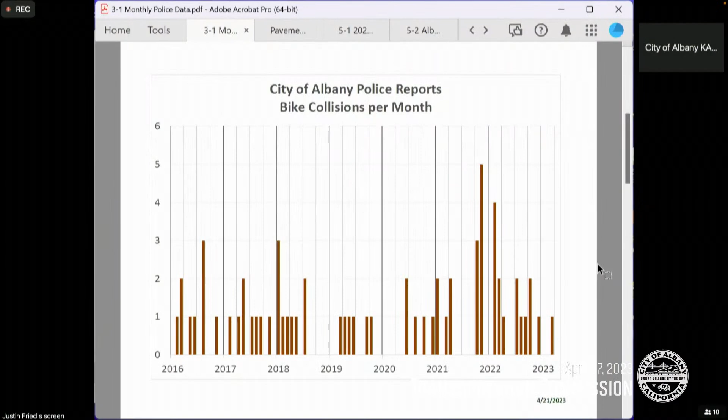There was 1 pedestrian-involved collision reported in February and 2 in March. There were 0 bicycle-involved collisions in February and 1 in March. In February, there were 9 reported collisions, 4 of which were listed as injury collisions, and in March there were 14 collisions, 7 of which were reported as injury collisions.

Moving citations: 25 were issued in February and 33 were issued in March. And there was 1 DUI arrest made in February and 2 in March. That concludes my report on the police data.

Are there any questions from commissioners? Would anybody like to make public comment on this item? Anybody in the room? Oh, yes, we do have someone in the room. Can you please stand at the microphone there so that everyone online will be able to hear you clearly? I'm sorry, Harry, I would like to make a comment. I can do it later.

The graph showed quite a reduction in tickets given to motor vehicles. Is there a reason why there's so many fewer than in years prior?

Any other public comment from folks in the room? Any public comment from people online? We do have 1 hand raised online. Jeremiah Pinguelo, please go ahead.

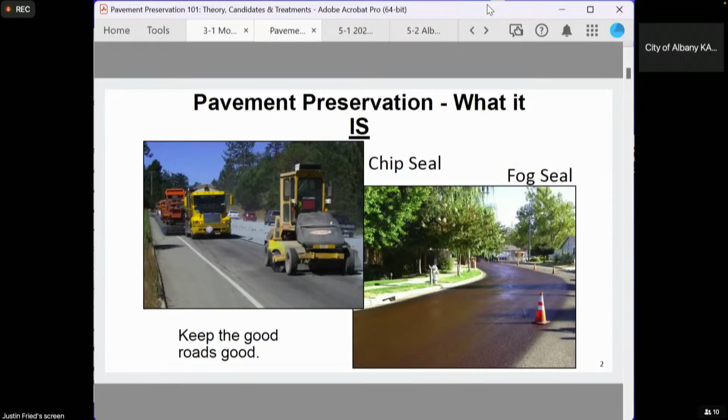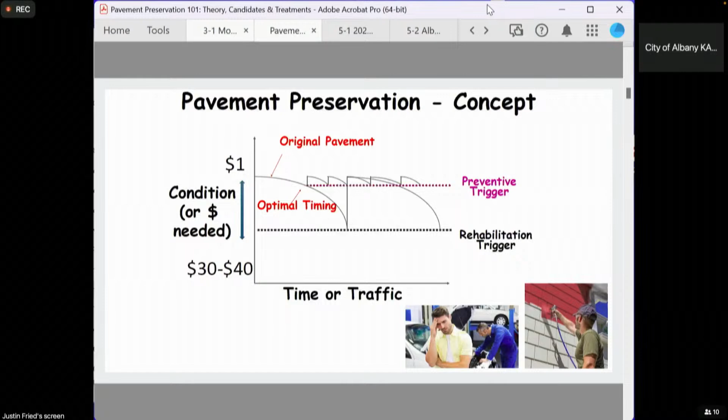An overlay should last a lot longer than 20 years, same as the wood at your house. The key is sealing it, continually sealing it, protecting it from weather and sun.

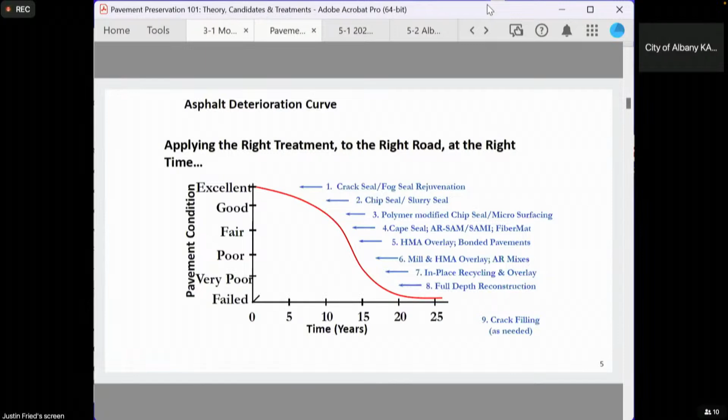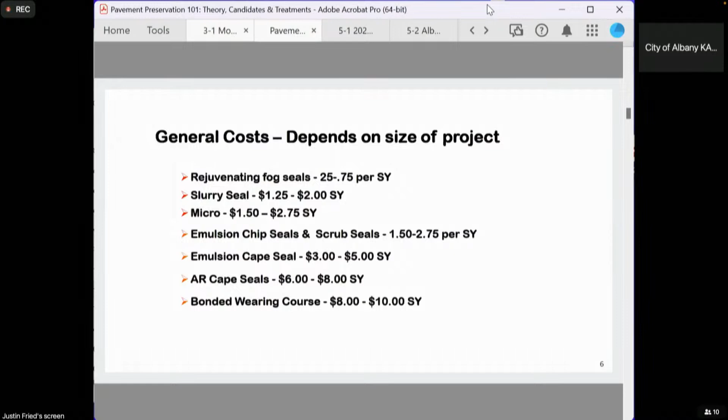These are your typical costs for pavement preservation treatments. As you can see, the cheapest is about 25 cents to 75 cents a square yard. And even on the most expensive high-end preservation treatment, it's still only about $10 a square yard. Greatly different than doing an overlay.

The best way to show you this is an example of a city. The example I have is a 300 lane mile road with their budget being 1.5 million. In my first scenario, the breakdown will be $1 million going to reconstruction, so overlays and whatnot, and then the 500,000 left over going into preventative maintenance, or keeping the good roads good.

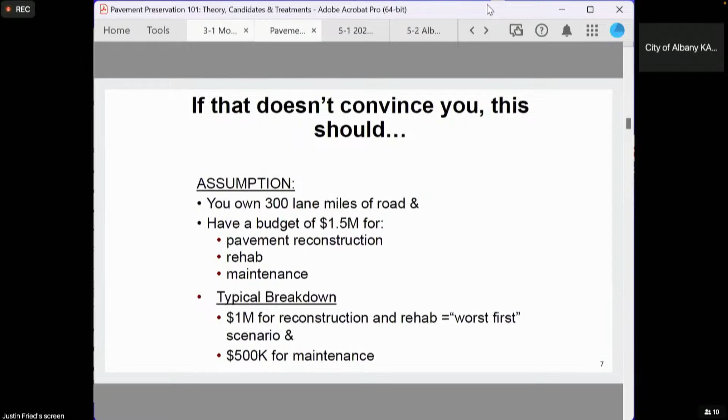In our first example, I put down a 3-inch mill and fill, which is 3 to 4 inches, pretty common in most cities. When you do the math on it, it gives you about 5.7 lane miles for that $1 million. When you look at the cost breakdown of the pavement maintenance, $4 a square yard is usually a 2-layer system. You get about 17.8 lane miles, so a considerable difference in lane miles. The total lane miles repaired is 23.5.

The most important number is the road cycle. What the road cycle means is the next time you've gone through your entire network and come back to your roadways is now 13 years later. And a lot can happen to a road in 13 years.

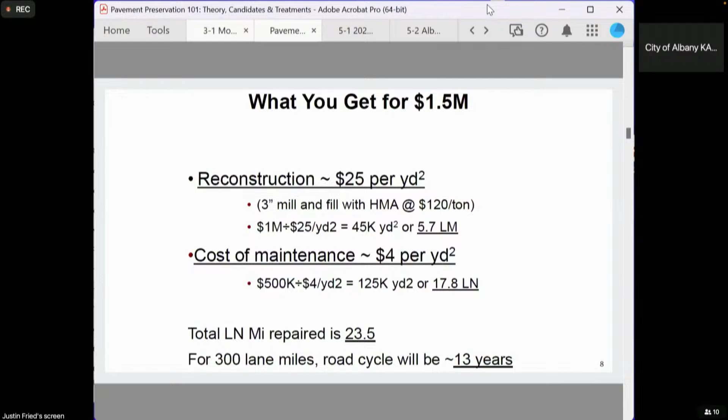So what happens when you flip it? When you put that 500,000 into reconstruction, you now go from constructing 5.7 lane miles to 2.8, roughly half. But when you put that $1 million into maintenance, you're now covering 35.5 lane miles as opposed to that 17. Considerably more roads are being covered and protected. And the most important number is that road cycle is now down to 8 years.

What I tell agencies all the time is a roadway that's already in really bad condition isn't going to get much worse 2 to 3 years later, but that road that's right on that trigger line, it's really critical to put the money into it and salvage that roadway.

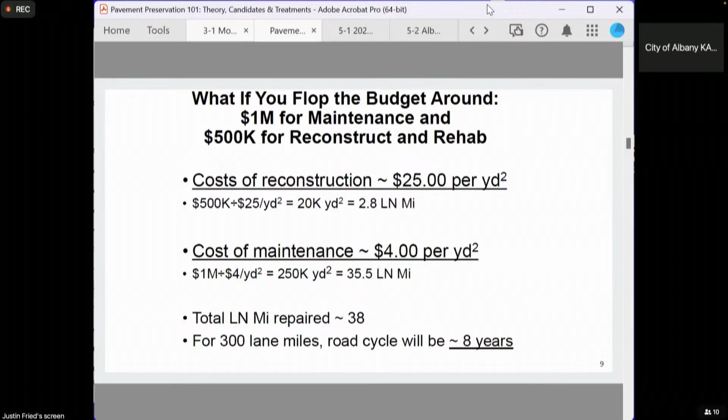The example I have was a city in Marin County called City of Novato. When they started doing preservation was in 2003. They started using slurry seals and cape seals. And you can see as the years went on, their PCI started to raise up. So what they were doing is they were covering their network, even on some of the more distressed roadways, with pavement preservation.

When I talked to them in 2015, I called the city engineer up and she told me, we're caught up. So it took quite a few years, but what caught up meant was they had sealed and preserved their entire network, where now the following year coming into it, they had millions of dollars to put into ADA. They had millions of dollars to do their collectors and arterials in their city, doing overlay. Not saying overlay isn't needed, but now they had the funding to do that.

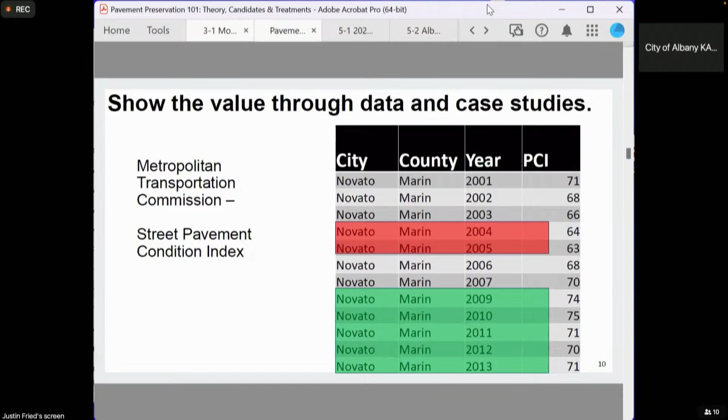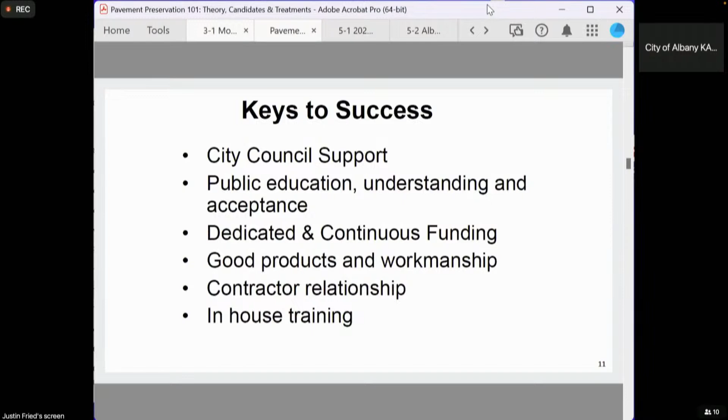This slide says keys to success. It starts from the top with city council, public education. Dedicated funds means having it be an every year or every other year thing at a minimum. When you wait 5 years to do maintenance again, then you fall down and the PCI goes out in your city. Good products and workmanship and contractor relationship is kind of what your city does already with inspection, consulting, and making sure it's being done right.

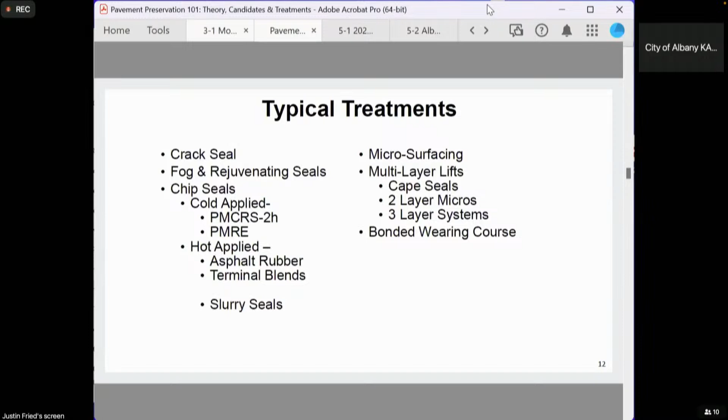Here are the treatments again in order of when they would be used, which I should have put earlier. This is the map of the current PCI condition of the city of Albany.

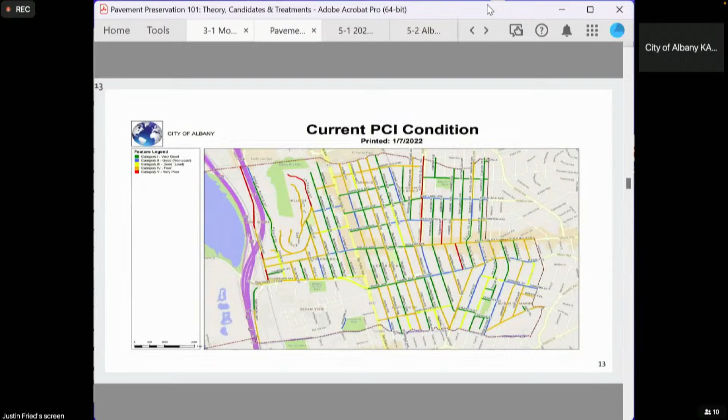It's hard to tell, but the green and blue category streets are in good shape, and then you have a lot of streets in the good, poor, and very poor network. So what I was looking at as a consultant for the city is I went out and reviewed all the good and poor streets to select candidates for the upcoming slurry.

Ideally, you want streets in good PCI, but what do you do with the streets that are on the border? You might not have the money to be doing an overlay. And in residential areas where you don't get a lot of traffic, putting a big investment like an overlay isn't a waste of money, but if you want to cover more lane miles, preservation is the way to go.

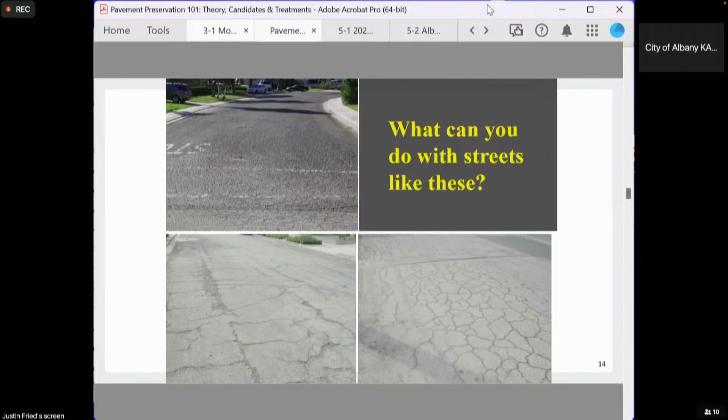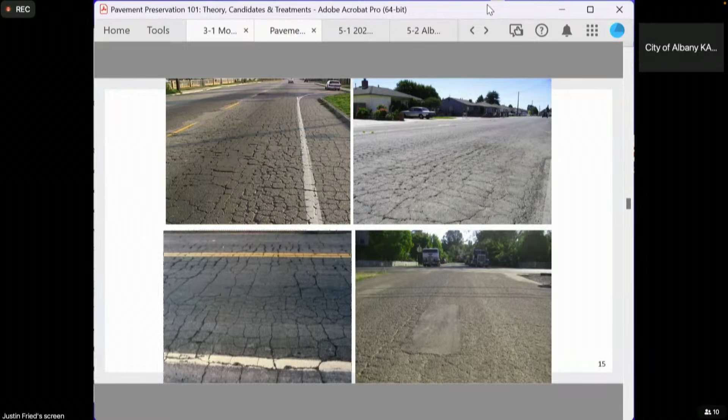There are some streets here in the city of Albany that look like this, and what you're looking at is just heavy distress, called alligator cracking. But structurally, the road is still in good shape. We're doing a low-cost maintenance treatment to extend your pavement life and give you the flexibility down the road to put money in other areas.

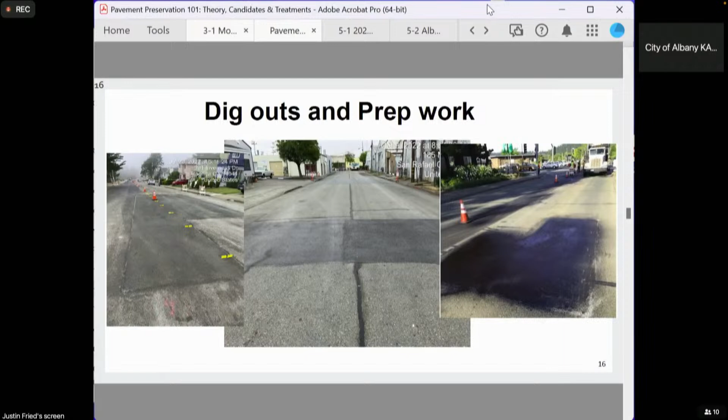One thing the city of Albany is doing right now is before any treatment or seal is done, they're going out and doing dig-out repairs. So on a stretch of road that isn't a good candidate, that might have a couple areas that are failing or not doing well, they go in and do a localized dig-out repair, bringing the road into a good condition to do a seal.

And then crack fill is your number one, your first line of defense. Keeping water from getting down below into the subgrade and ruining the road from the bottom up is what you're trying to prevent. Back to like sealing your house, right?

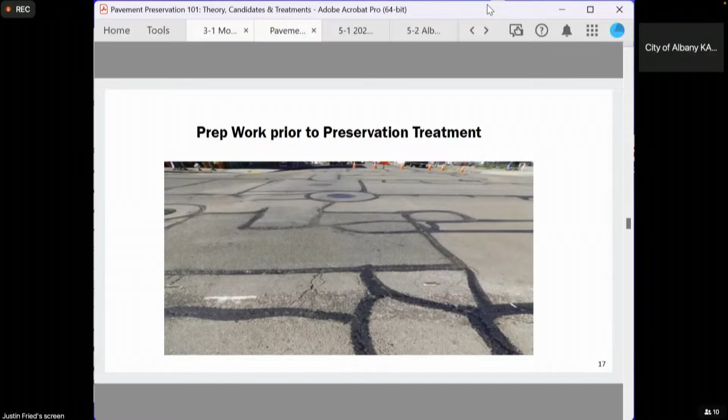I'm going to go through some examples of neighboring cities that are using these treatments, even on lower PCI roadways, and getting 5, 7, 10 years of protection.

So first, the city of Martinez. On a road that was a PCI of 49, pretty low. When you look back at the map, in those orange and red categories, that usually falls in that arena. With the city of Martinez in particular, they didn't have the funding, so they were looking for a different solution. So they tried the two-layer micro-surfacing system. You can see the size of the cracks and the distress of the roadways, and then down below the 7-year later picture on a maintenance treatment that only cost them about $5 a square yard installed and got 7 years of protection. I live in Martinez, and that's a 12-year mark and still looking great.

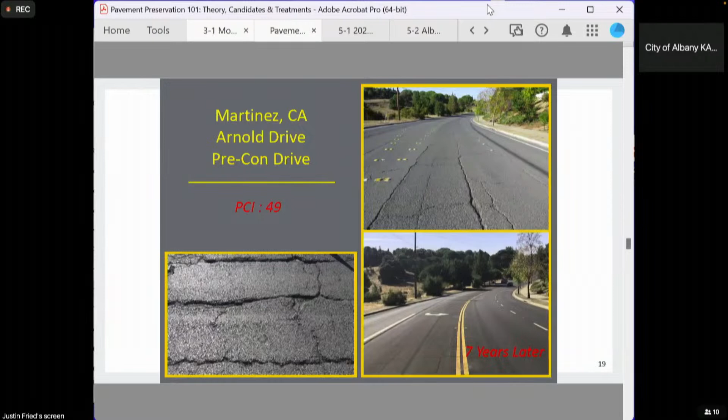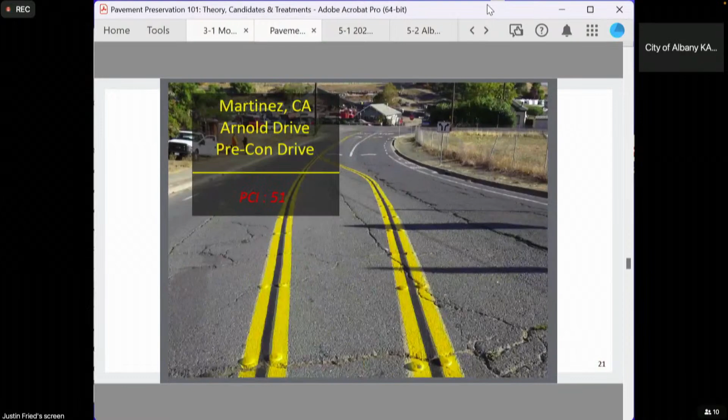Here's just another example, PCI 51 farther down the road. And then the last slide, just the distresses for it, and then the 7-year mark.

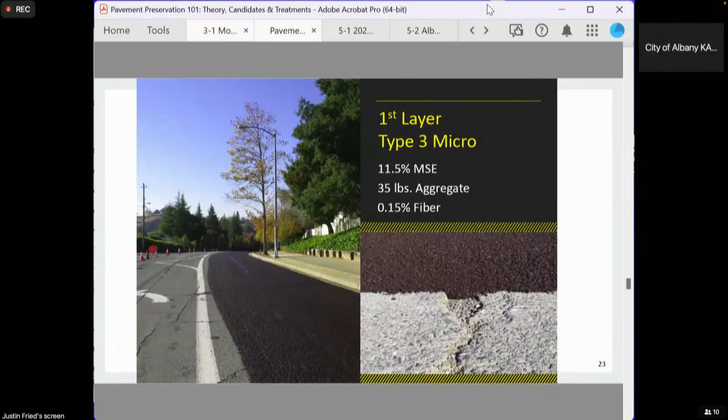Here's another example of a single layer. You can see the amount of distress going down. And then there's your final product, much like what the City of Albany is planning to do this summer.

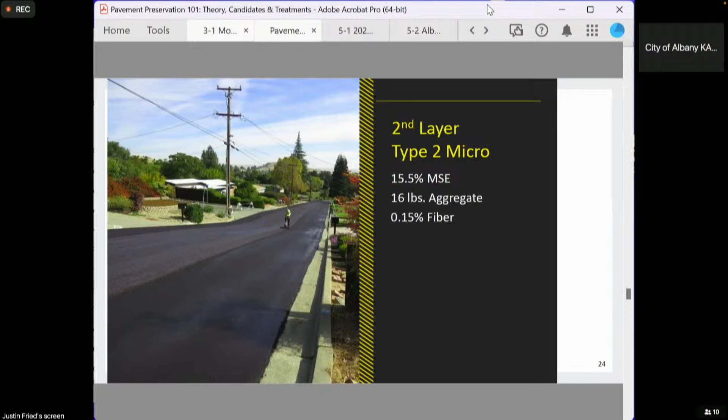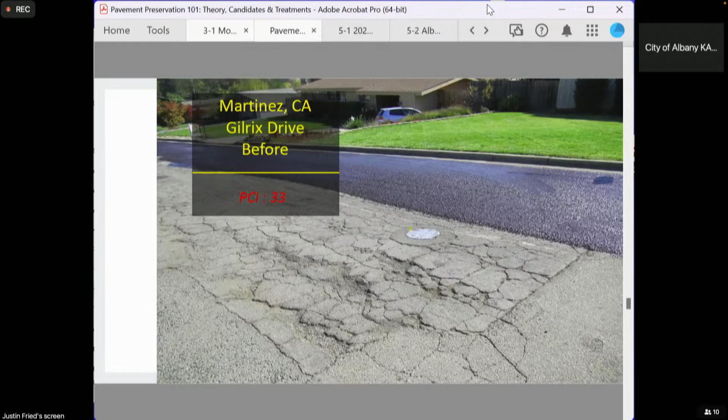Here's a worst case scenario, and I put this in here because this is actually going to be a 2-layer system. PCI 33, that's an overlay. When you look at a road that's that distressed, the right recommendation as a consultant would be you need to overlay this, you need to reconstruct this, it needs to be replaced. This is in a residential area, not a lot of traffic. The city had a lot of needs in arterials and collectors that they needed to do overlay on, and so they didn't have the budget to do the residentials. So they decided to do a 2-layer microsurfacing system, which still was under $6 a square yard installed.

This is right after construction. The way PCI works is when a treatment is put down, it then gets a bump up in PCI rating. 7 years later, you can see the condition of it is still amazing in the residential area. So it's a really real-world solution for residential areas, and it actually helps you get ahead of that curve of having these bad streets and your maintenance streets, and kind of changes that outlook.

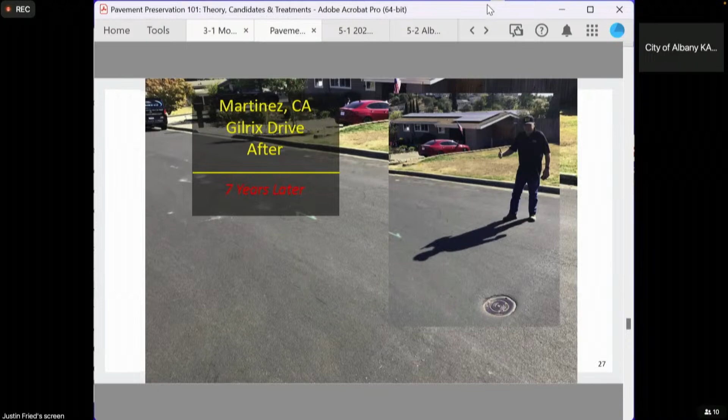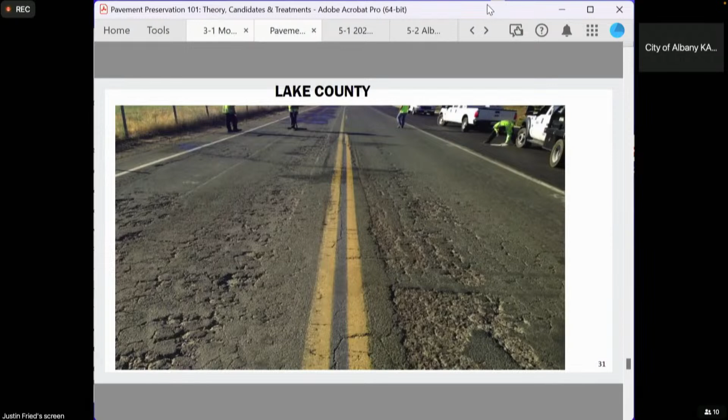This is just another example. This is Lake County doing a 3-layer system on a roadway that was an absolute rip-up. They did an asphalt rubber or microsurfacing, asphalt rubber chip seal as the 2nd layer, and a type 2 slurry over the top of it.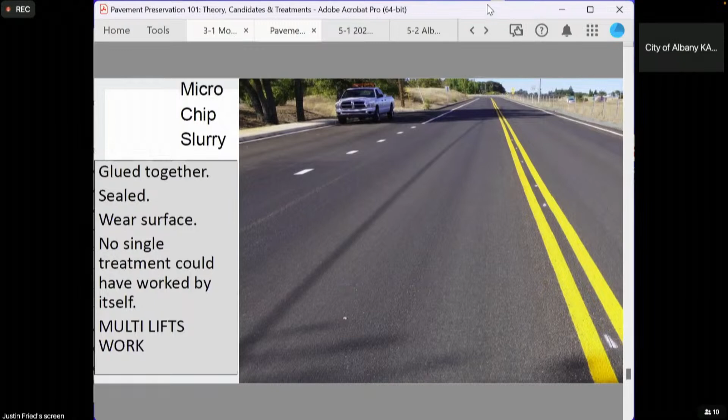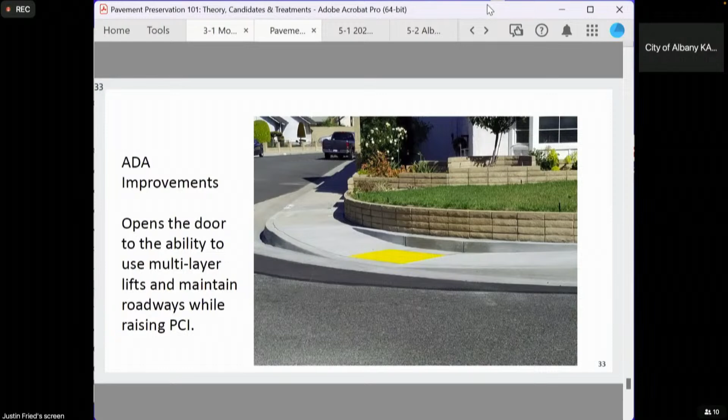So single-layer systems with preservation are very cost-effective. You can cover a lot of roadway. I didn't go into detail, but with multi-layer lifts, that means 2-layer preservation. It's still very cost-effective. The only thing with city and urban areas, which the Bay Area deals with a lot, is you have to have your ADA or curb ramps up to date. Once those are done and you put the investment in that, the world of being able to maintain your streets at a lower cost and raise your PCI really opens up.

And the last slide. That's it. That's what I have.

I think David had a follow-up presentation. Oh. Thank you.

Good evening, Commissioner. Good evening, attendees. So Cesar gave us the background for the general idea of pavement preservation, and my presentation will follow up with project specifics of how we packaged up the 2023 Slurry project.

Next slide, please. Starting with the project scope, we're targeting a thin slurry application for our streets, and that slurry application will cover approximately 38,600 linear feet, or about 125,000 square yards. To supplement the slurry, we're including base repair or digouts, assuming a 4-inch depth for the digouts, and covering about 18,000 square feet where base repair is needed.

As mentioned, this is targeting a preservation treatment, so we will not be including any grading modifications. We will not be including any curb ramps as part of the project.

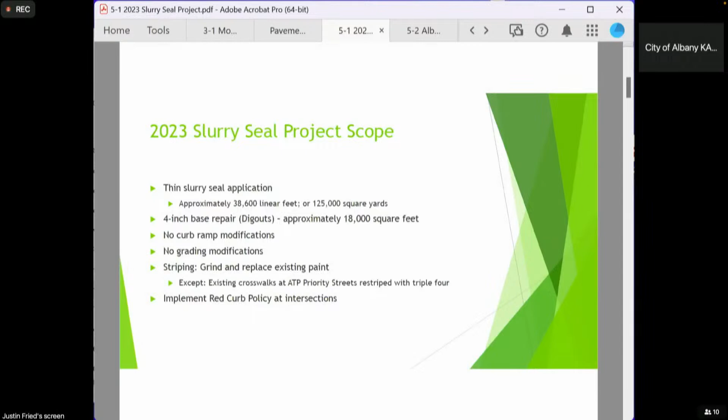So I want to touch on the parameters that went into our street selection. First off, we targeted streets that were identified as candidates for pavement maintenance when I last presented to Commission back in May of last year. These were, as a refresher, streets that were typically between PCI scores of 70 to 90, so they were already in generally good condition and good candidates for preservation treatment.

After that, we looked at streets that were, like Cesar touched on, maybe a little bit below where we would normally target streets for preservation treatment, but with some localized base repairs or digouts, we could extend the life of these streets with the efficiency gains instead of going for a full rehabilitation treatment. Finally, we looked at streets that had low PCI scores that, when doing field investigations, had very few structural issues identified and would still be good candidates for an overlay treatment for preservation or extending the life of that street.

Streets that we did not include are streets where we have upcoming projects that are known. For example, Marin Avenue, we have the second half between Key Route and City Border coming up. We did not include streets that had more complex transportation considerations, so Solano Avenue, Upper Solano and in the Hill. And also streets that we identified as good candidates for a multi-layer treatment that may trigger additional considerations. So we left those off of this project.

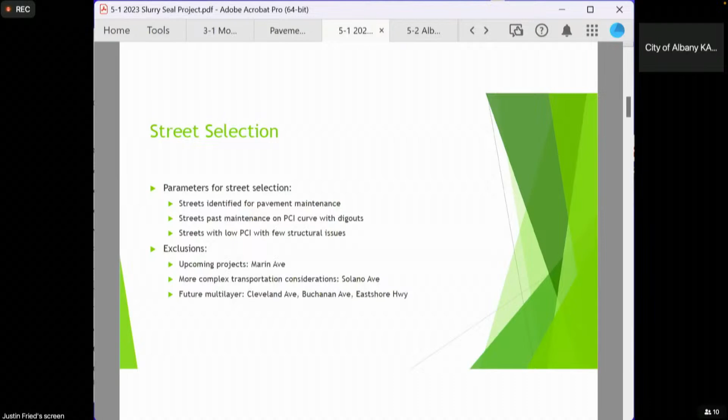Slide. So this is a map showing the coverage of the streets. As you can see, we have a lot of coverage over in the Albany Hill area. In the area of the city between San Pablo and Masonic, there's not so much coverage. We did complete a paving project this year, the 2022 Pavement Rehabilitation Project, which did cover several north-south running streets. Also, because we avoided locations with upcoming projects, one of them is an upcoming sewer project on Brighton, and actually some additional East Bay MUD pipeline projects. There's also a storm drain project coming up in the Albany Terrace area, so there was a candidate street removed from that neighborhood.

Next slide. So I added the slide to highlight the streets in purple, which are generally the pavement preservation candidate streets. But as you can see, included in this project is a lot of coverage of streets that back in 2022, when we had identified candidate streets, they were candidate streets for rehabilitation, a more expensive treatment. So with this project, we're actually extending the life of streets where normally we would have spent a lot more money for and potentially have fallen behind on our pavement program.

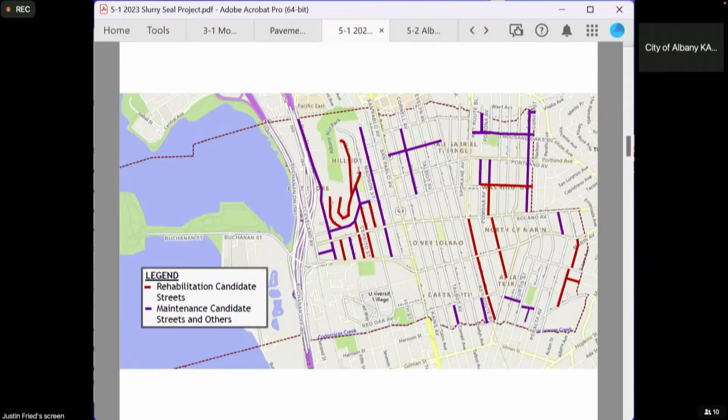Next up, I want to cover a couple of examples of what we'll be doing in the 2023 Slurry project. I included three locations. The first is the intersection of Talbot and Portland.

So this is the current condition. Talbot is generally in good condition, one of those streets in the mid-70s in PCI, but you can see it's starting to see a little bit of wear over the years.

This is depicting what it would potentially look like with a new slurry overlay. Because Portland is identified as part of the ATP pedestrian priority network, we are adding 444s going across the Slurry project limits. Also, the existing red curb in the area will be refreshed, and the red curb policy would be added to this intersection. Note that the stop paint is out of the frame of this picture.

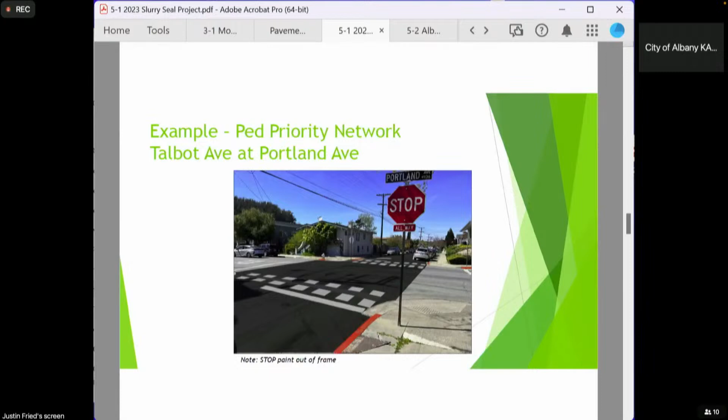Second example is up in the hill on Washington Avenue, where we have a speed table. This is what the existing looks like. Again, generally okay condition, starting to show some wear, but could use a little bit of refreshing.

What it looked like after Slurry would be a nice new surface, nice refreshed paint, and refreshed striping. Again, there would be no change in configuration of the striping, just adding back on top of the Slurry layer.

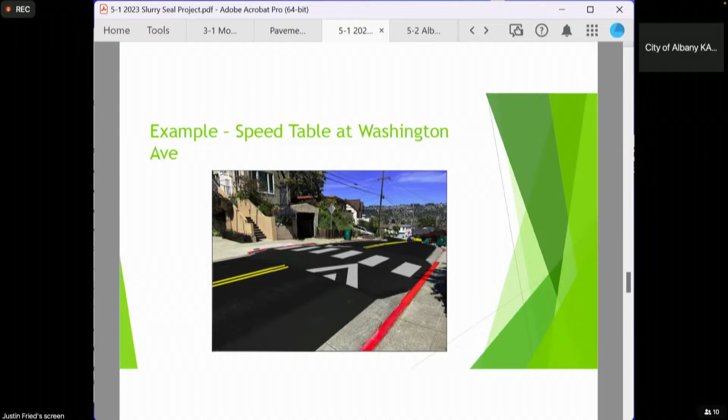Third location is going to be the intersection of Jackson Street and Washington. This is the existing condition. We actually came through on that 2022 pavement rehabilitation project on Jackson, which extended into the intersection, so we did get restriped 444s on the north and south crossings.

With the limit of the Washington Avenue Slurry, we include the crossings on the west and east side. Those crossings would then be renewed as 444s, yellow, having a nice new layer and a refreshed red curb.

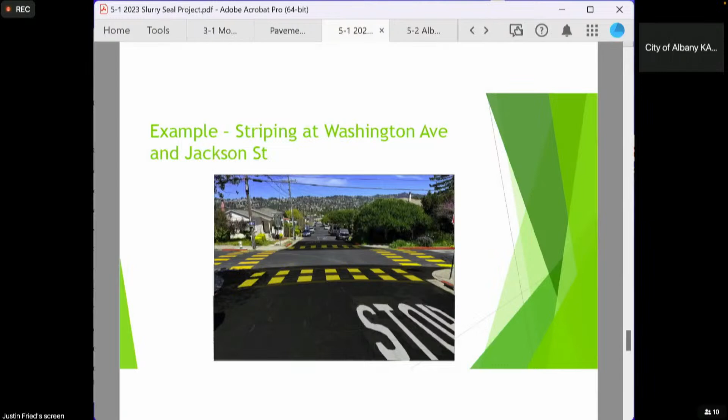So the targeted project schedule is getting commission to review and recommend this project to council during this month's meeting. We're targeting the May 15th council meeting to go out to bid, with the bid opening in June, and construction targeted for start in August, September. This timeline is a little tight. These contractors typically complete the Slurry construction in summer before the next rainy season starts, and an August, September timeline would give us a narrow window to get construction started and finished before that rainy season.

It's the end of my prepared slides, and I think what we'll do now is take questions on both of our combined presentations. Questions from the commission first.

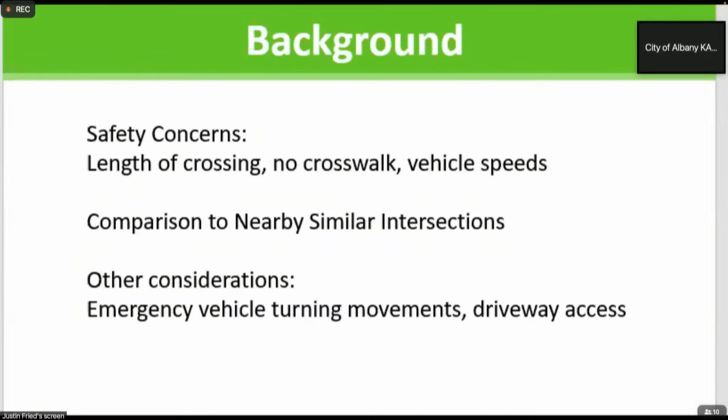Additional background context here is that Santa Fe is both on the skeleton sidewalk and pathway network, as well as the broader, more complete network in the active transportation plan, and is a Sharrow/fast bikeway in the active transportation bike network.

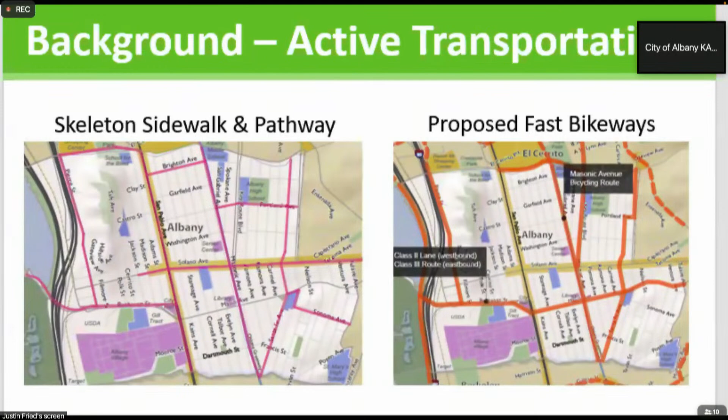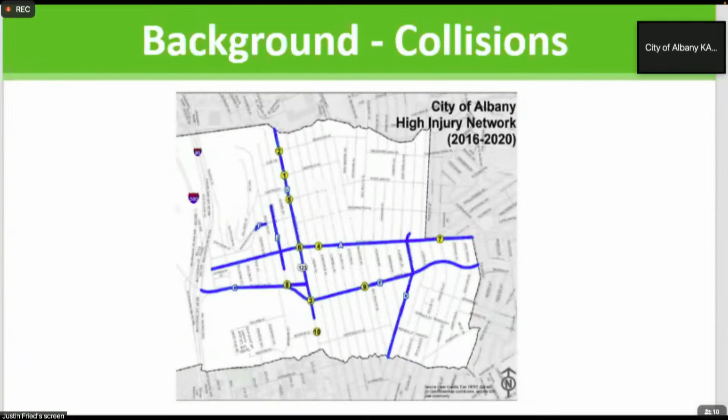We did just complete a local roadway safety plan. There weren't any reported injury collisions at this intersection, neither during the 5-year period of the local roadway safety plan nor looking back at a longer window to 2011 in the TIMS database that we review annually. The Santa Fe corridor, though, has seen injury collisions enough to merit being identified as part of the high injury network in our recently approved local roadway safety plan.

The other context here is that we took a look at several of the blocks on Santa Fe, and the 1100 block was included as a block requesting traffic calming, with volumes of vehicles traveling over 25 miles per hour, leading to a recommendation from this commission to review traffic calming measures for the corridor.

The final bit of context before I hand it over is the comparison to other intersections with similar angled, askew junctures with Santa Fe. At Ramona, there was a treatment that separates the Ramona approach to Santa Fe, with southbound vehicles going on one side of a triangle, and incoming westbound/northbound vehicles split into two crossings, with a traffic calming island in the middle of the roadway, taking advantage of not having a parking lane through that intersection to narrow the Santa Fe vehicle lanes heading north and south.

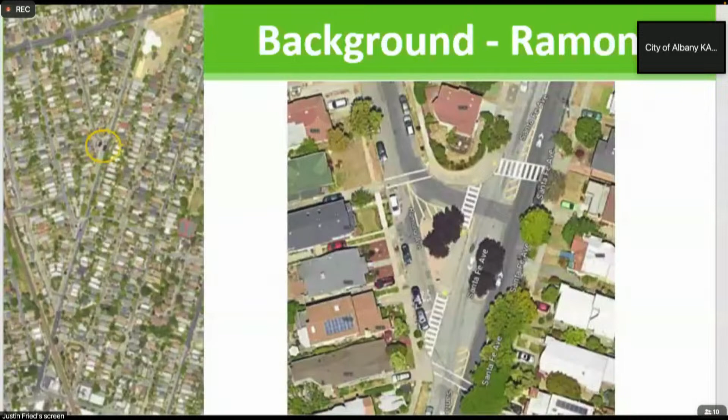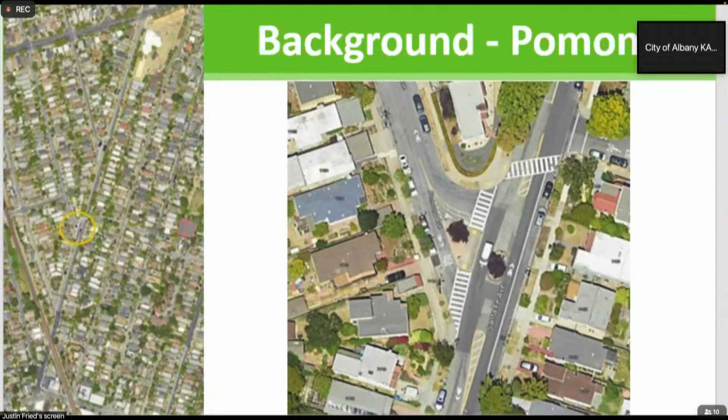Similar treatment at Pomona. The one thing we have heard regarding this design is that the fire department finds it difficult to navigate and maneuver, so they asked us to look at other alternatives as part of our project here.

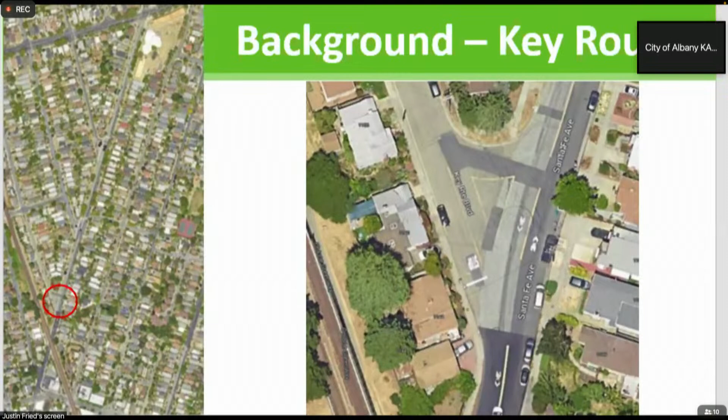The other context, James will present more on this in the next item, but sidewalk repairs are needed at the north end of the juncture between Santa Fe and Key Route, and they're triggering upgrading the curb ramp along the west side of Santa Fe approaching this large crossing. So we're looking at this concept now to inform that near-term repair work, as well as to implement the rest of the concept as a future project.

With that, we asked Andrew Lee with Parisi Transportation Consulting, now Parametrix, to develop quick build and permanent concepts to give us flexibility in looking at how we implement this, really addressing the right-of-way, safety, crossing visibility, and vehicle speeds. And with that, I will hand it over.

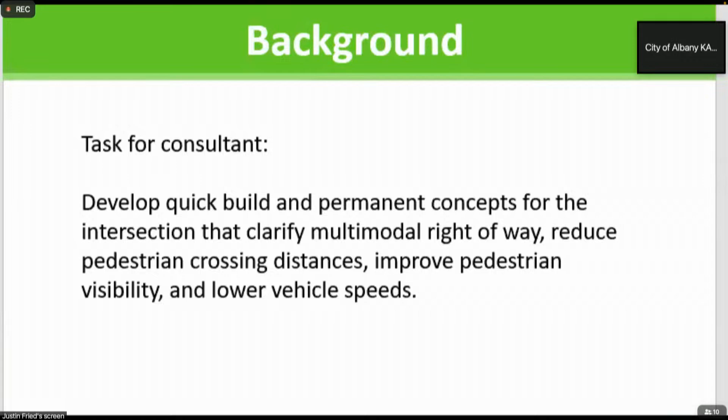Let me pull up his slides. Hold on. Okay.

Good evening, commissioners and staff. Thank you, Justin, for setting that up. I'm Andrew Lee with Parisi Transportation Consulting, which is now a division of Parametrix, and I'm pleased to present some of our conceptual ideas on this important intersection.

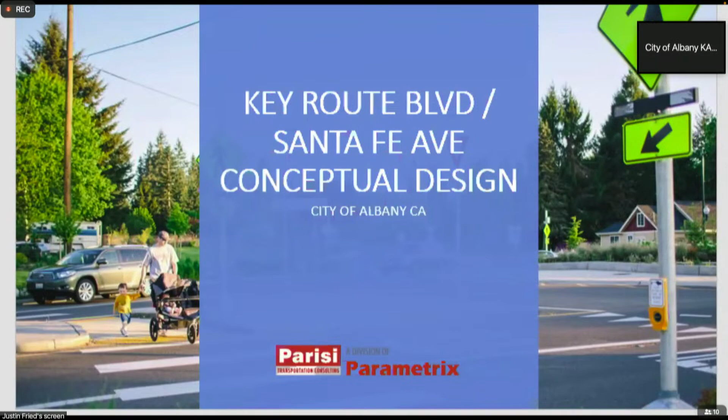Next slide, please. Justin set the context for me, so this is a vicinity map showing our study intersection of Key Route and Santa Fe. Some of the issues that came to our attention: with the skewed approach of these two streets, there is a very large unmarked crossing, approximately 110 feet on the west side of Santa Fe, with no marked crosswalks.

It doesn't have that interruption in the pedestrian path of travel that Ramona and Pomona have. So a person traversing this intersection, particularly on foot, is in a very long crossing that's unmarked, and it's a very large area for people in cars to navigate through. Largely, it's not well defined because the striping is pretty worn, and there are no raised features to indicate proper channelization.

Given that, we started looking at some of the constraints. Intersections tend to provide superior sight distance when aligned at approximately 90-degree angles. This being closer to a 30 to 40-degree intersect, a person driving southbound on Key Route has to look over their shoulder to see traffic coming southbound on Santa Fe, and that angle makes it more challenging to track people possibly crossing Santa Fe on the other side of the street, making sure they're paying proper attention to other vulnerable users besides drivers. Next slide, please.

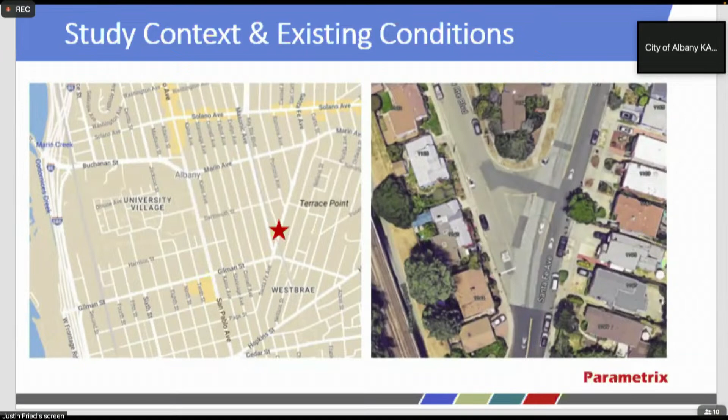We started taking a look at some of the vehicles we could expect to normally traverse this intersection. A box truck, an SU-30 design vehicle, is probably on the larger side, but they do come through residential streets, somewhat as a proxy for a large Amazon or FedEx delivery truck. We also wanted to look at what a large design vehicle could look like, so we took a model of a hook and ladder fire truck and ran that through here. What we can see with these large vehicle turns is that this intersection, given its angle, actually has a lot of space to squeeze inward and still allow for these large vehicles to comfortably make this turn.

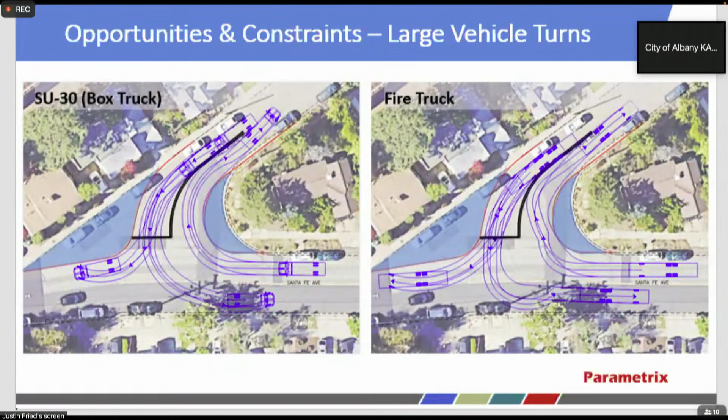Given that, the areas shaded in blue indicate where we think space could be reallocated into something else besides roadway. We wanted to see if this could afford other benefits, like angling the intersection closer to a 90-degree intersect, thereby reducing the exposure area for somebody on foot crossing from north to south. Next slide, please. We developed a quick build concept that largely replicates that shaded area shown on the prior slide.

The idea here is that if we were trying to implement an improvement or concept that did not require moving the existing curbs and gutters or widening the sidewalk, there could be something done using materials like paint, thermoplastic, pavement coloring, raised posts, and sometimes rubber curbs to narrow the intersection, both visually for drivers and to channelize pedestrians, providing a somewhat protected area that lessens their exposure to oncoming traffic.

So this is our quick build alternative. We do notice that where the pedestrian path of travel continues across the intersection, there would likely need to be some sort of curb ramp to allow for an accessible path of travel.

These curb ramps don't currently exist. I'll add that these little black circles indicate raised posts, and I left some posts out to leave open the opportunity for homeowners in front of these streets, particularly the southwest corner, to maintain on-street parking if desired, or this could be reallocated and closed off as well. Those yellow areas are not decided in any way as to what kind of feature it could be, whether raised or painted. It's an open flex space that could use more planning and discussion.

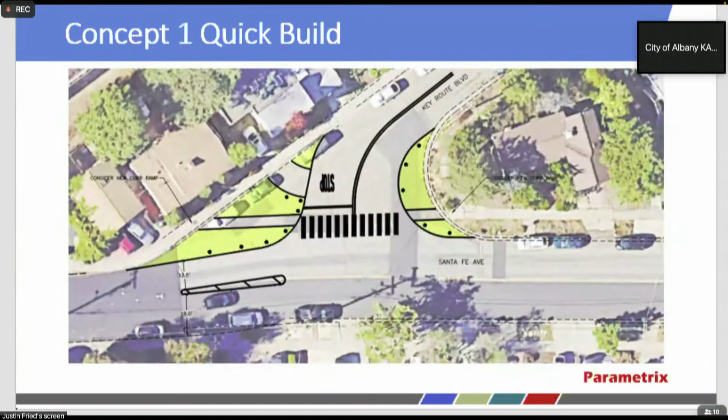Next slide, please. The corner reconstruction concept shown here is a more permanent concept that would require reconstructing this intersection with new curb, gutter, and sidewalks. We also see the opportunity to construct new curb ramps on the west side of Santa Fe. The flex space previously indicated with color treatment could be changed to a planted area, some other form of landscape, or a stormwater collection and retention zone.

These are all possibilities. You'll also notice on Santa Fe, going north and south, given concerns about high-speed traffic, we show in this concept a new crosswalk on the north leg, on the right side of the exhibit, going across Santa Fe with a raised island. We indicate the presence of that island with traffic striping so oncoming vehicles know this turns into a slower zone with the crossing in the street.

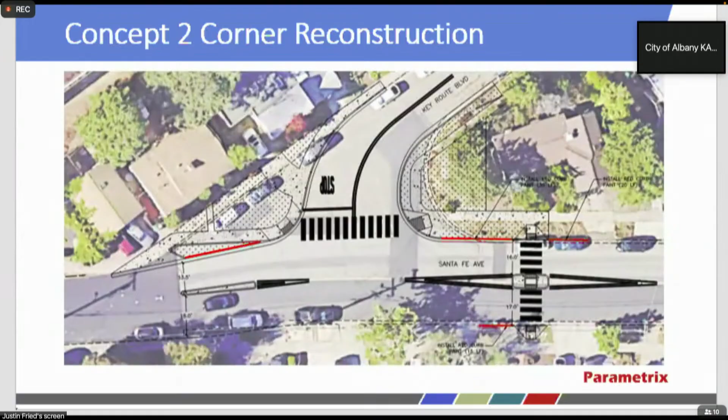We tried to shape the placement of the islands so they would not interfere with existing residential driveways, trying to maintain access in both directions to the greatest extent possible. We also have areas where parking would need to be prohibited in order to provide adequate sight lines near the corner and near the crosswalks.

Next slide, please. I think that concludes my presentation. Here to take questions. Commissioners.

I know staff had told us the fire department had some concerns about Pomona, whichever one is most northerly. That's actually Ramona. Is it Ramona or Pomona that they had trouble with? Both — they're a similar design, pretty similar. I'm looking at them right now on Street View. So that's the reason we can't do something similar here?

Okay, I really don't have any other questions for now.

My question is, would you suggest using the quick build as a first phase to test the configuration, have the fire department drive through it a few times and say they like it, or that it could be scooted over 6 inches? Yeah, if it's installed with paint treatment, for instance, that's actually a very effective way to see how the vehicle tracking goes, and sometimes you get a larger than expected vehicle come through, or maybe we're just a little too aggressive with the models trying to squeeze out inches and it doesn't work out so well. It's a good tool to evaluate final placement of permanent features.

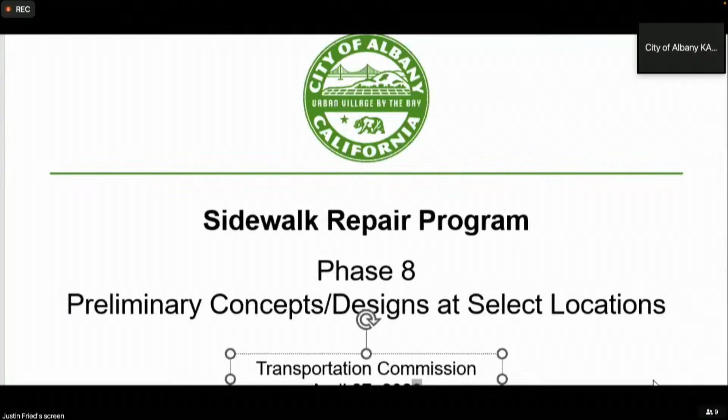Good evening, Commissioners. I'm here to talk about some preliminary concepts and designs for Phase 8 of the Sidewalk Repair Program. As Justin just mentioned, we did repost these slides on Tuesday, mostly because we had to rearrange the presentation. So we'll start first with some preliminary concepts for two Phase 8 locations.

This is related to curb ramp upgrades, and then we'll move on to holistic repair locations. We briefly talked about this in January, and as promised, we're back to talk some more.

So first, 1612 Solano, and for reference, this is at Solano and Ventura. We have a location at the southwest corner here, next to the AT&T building, if you're familiar. This is one of our critical repair locations. The amount of work we need to do is specifically because there's a lot of poor conforms, so we had to extend this repair footprint a lot further down Solano than immediately needed attention.

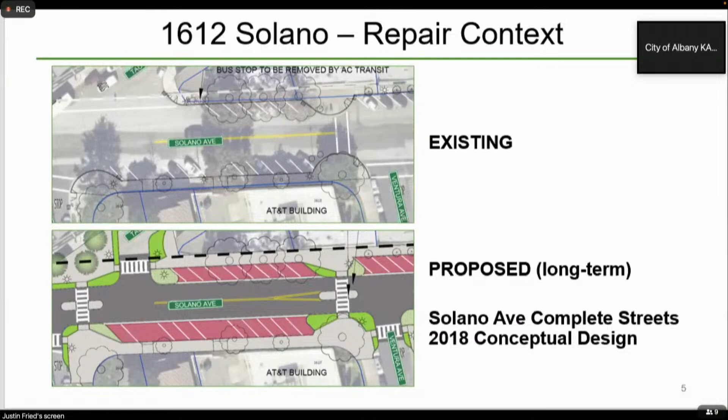We don't really want, this program, it's the Sidewalk Repair Program, so we're really focusing on that one corner. And we have limited funding for a large-scale project like this, even if we were to pull it from some of the paving funds, which might be appropriate. This hasn't been budgeted for. And doing this kind of as a spot improvement rather than a corridor-wide improvement would be an ineffective use of our costs. Doing it as a corridor-wide treatment would be much more efficient.

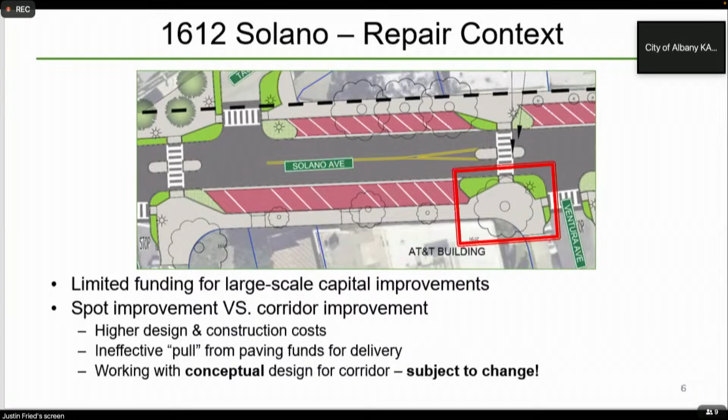But those two points aside, I want to really focus that this is a conceptual design. And being a conceptual design, it's very difficult to actually construct, especially because it's subject to change. It's been 5 years since the Solano Avenue Complete Streets plan has been talked about.

So to talk about some of the difficulties, if theoretically this was pushed to do as a spot improvement, we have a lot of issues with effectively constructing a few things.

I think number one is drainage. Based on the conceptual design, it looks like drainage flows between the travel lanes and the parking aisle. That's not how the street is currently designed — it flows to the curb. So if we were to build this bulb-out, bulb-outs always affect drainage, and we don't have a proper plan for how to construct it to work with drainage now and in the future at the same time.

There's also difficulty with crosswalk alignments and curb ramp alignments. This is designed to be constructed together, so it's easy to make sure these curb ramps align and the crosswalks go across at as close to 90 degrees as possible. If we were to just do one side, it would probably complicate construction in the future.

And being conceptual design, there's been some back and forth about whether Solano will be pull-in parking or back-in parking. Constructing as it is now solidifies at least this block as pull-in parking.

Lastly, the median island — again, with the alignment of the curb ramp and crosswalk — without knowing the full width of the bulb-out across the street, we really wouldn't be able to place this median properly for future design.

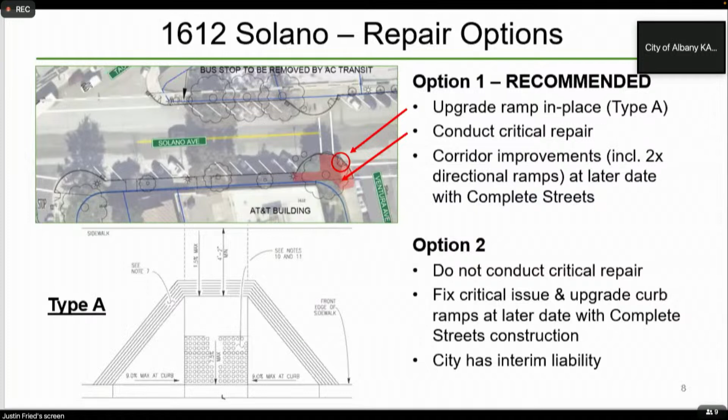So ultimately, our recommendation is to get this critical repair done in Phase 8 later this year — to upgrade in place the Type A diagonal ramp, with the context that long-term we will rework this intersection as decided with the Solano Avenue Complete Streets design.

And since there are going to be recusals, we're going to work through this, and this will be the first action of the night.

I'll stop here for questions. Do we have any questions from commissioners? Just one.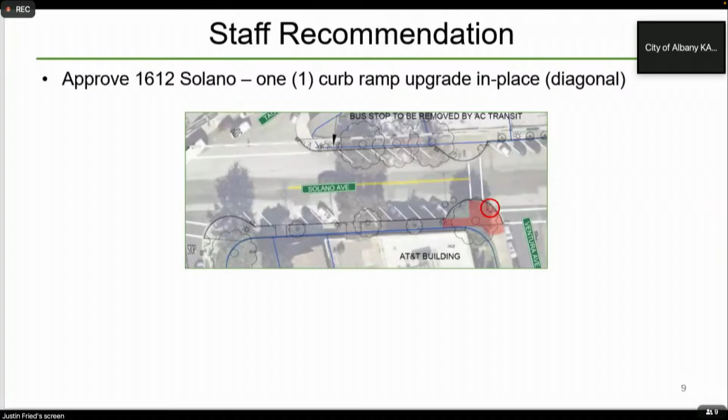If we replace the curb ramp where it is with the upgrade, would it include any striping or markings to incorporate a path of travel to the crosswalk — kind of like the little diagonal stripe next to it leading into the crosswalk? Does that make sense?

I'm not sure what you're referring to, but we wouldn't really be touching the street because we'd have to grind down any striping on these crosswalks, and this is just a sidewalk project. Okay, all right, thanks.

I'm curious about why the single width, or basic width, curb cut has been chosen instead of a slightly wider circumference of curb cut. And I'm curious if the tree planting box cement is going to be replaced or not.

So the planter box, we're going to work that in somehow — we can't repair the sidewalk and then put it flush to a broken piece of concrete, so yes, we will be working that in. We might have to slightly adjust the part that I think has a volunteer tree in it right now, because I don't think we have the full 4 feet we need for the landing, but it won't affect the fully grown tree there. So yes, we will repair that.

As for changing the curb ramp, I'm thinking you're referring to maybe a modified C or something like that — or I'm not allowed to express an opinion at this time.

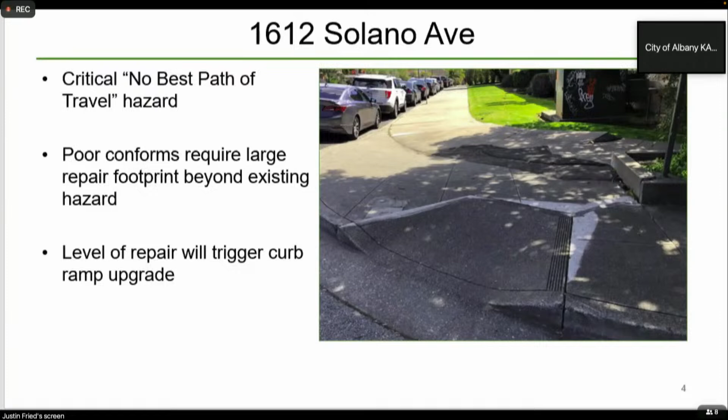Any other commission questions? Okay, let's move on to public comment. Would anybody in the room like to comment on this item? Would anybody online like to comment on this item? I'm not seeing any hand raised online. Never mind, just got one. Jeremiah Pinguelo, please go ahead.

My only question is, why is it yellow circle bumpies instead of blue? I mean, it's ADA, and I think the universal color for ADA is blue, right? So I'm just wondering why it's yellow. I thought yellow had to do with schools or something. I'm just wondering where the choice of color came in, because I just think it should be blue if it's an ADA ramp.

I like the bumpy things because also that helps out with blind people, so they're able to tell where the sidewalk ends and street starts, because they could feel the bumps with their walking cane. So that's one advantage of the circle bumpy things, is it really does help blind people get around. So yeah, I was just wondering why isn't it blue? That's pretty much my only question.

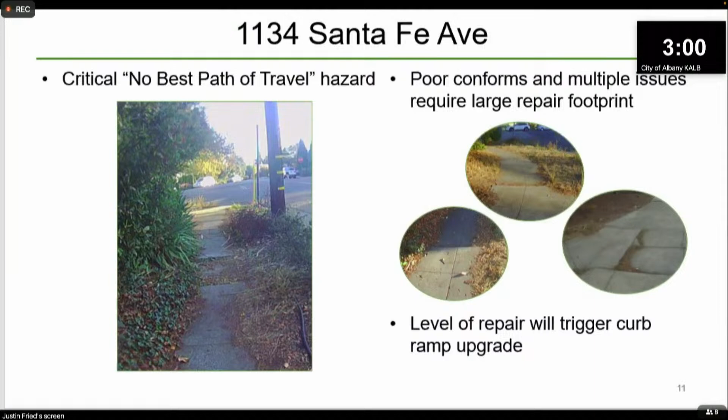All right, this is 1134 Santa Fe. We've already seen this before. I'm going to go through this quickly, but it's a similar situation. There's a critical repair needed under the sidewalk repair. We're doing a larger repair to address poor conforms and issues, and it's adjacent to a curb ramp, a non-compliant curb ramp. So this repair will trigger the need to bring the curb ramp up to code.

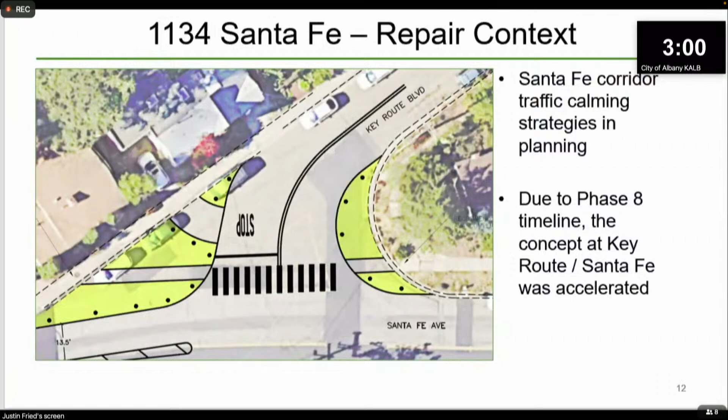You already went through the context here with the calming. This was accelerated at this intersection because we needed to figure out how to lay out the curb ramp. So what we're recommending is we repair the curb ramp in place during phase 8, and any long-term rework will be done as determined.

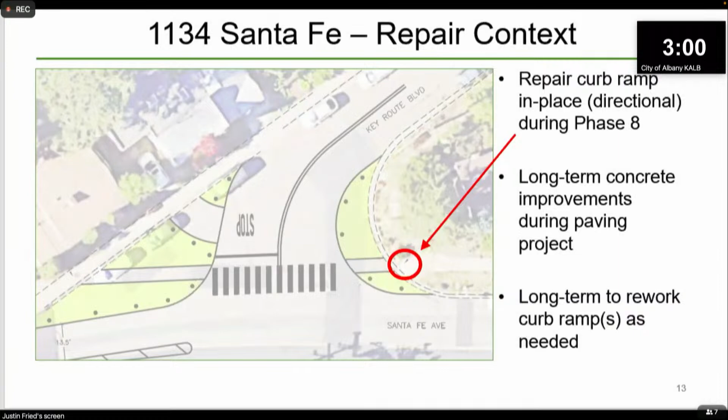So this would be a type F curb ramp. What that means is a ramp with retaining curbs on the side to keep it straight in line. These retaining curbs will be outside the path of travel when it meets the sidewalk, so they will not be a tripping hazard. This ramp will ultimately align with the quick build improvements recommended earlier.

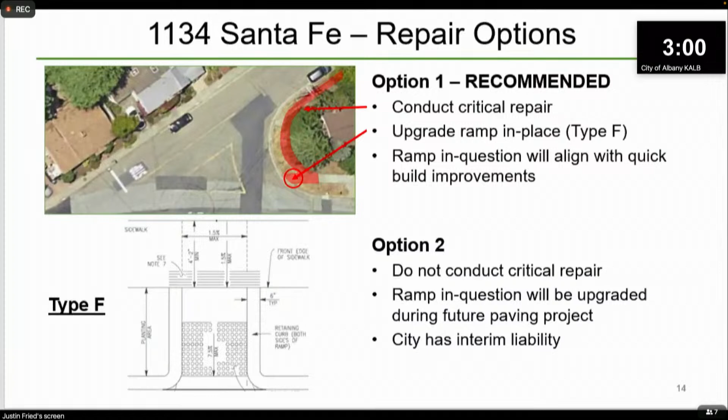Similar situation: if we don't do this, we have interim liability, and it wouldn't get repaired until a full-on paving project, not a maintenance-style paving project. So unless there's more context needed, we are recommending to upgrade that curb ramp in place with the type F, so we can get the critical repair done.

Okay, any questions? No. Questions from anyone in the audience? Question?

My name's Margarita Kloss. I'm sorry, I'm a little hard of hearing. Could you tilt the microphone up? Yeah, so you speak into it. There, thank you. Sorry, Michael. My name's Margarita Kloss, and I live two houses in.

Did you just say that the curb ramp is going to be not where the sidewalk goes? Is that what you just said? It is kind of, as you see now, it'll follow the Santa Fe path. It's directional in the Santa Fe travel.

Okay, and those side curbs aren't going to be a trip hazard for people walking on the sidewalk? No, they will ultimately come up and either be flush with the sidewalk, or we'll have them in a way that they're not aligned with the path of travel. We do not want to put retaining curbs within the path of travel because we don't want the tripping hazard. Okay, thank you.

Anyone else? Anyone online? Don't see any hands raised online. Okay. Final comments?

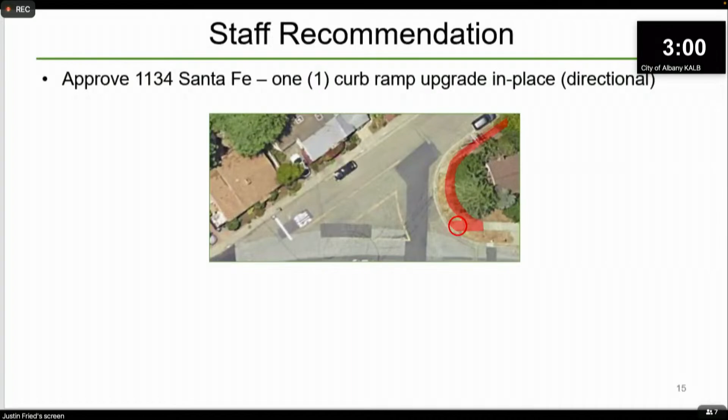I like option 1. I would at least like the alignment of a crosswalk across Santa Fe explored, to make sure it's not built out in a way... you know what I mean? Right, so if we're going to put a crosswalk across Santa Fe, you just want to make sure this is independent of that crosswalk. It doesn't preclude any future crosswalk across Santa Fe. Thank you.

Okay, but just for clarification, the crosswalk we're considering for Santa Fe is a little further down. Right, so it should be independent. I think that wraps up this one.

Do we have a motion? Do we need a motion on this one, Justin? I'll move that we recommend option 1. I will second that. Okay, can we have a roll call please? Commissioner Burns? Yes. Commissioner Javendal? Aye. Commissioner McCroskey? Yes. Motion carries.

Next item. Gain one, lose one. Now, who's leaving for this one?

Before any recusals, generally, the next two are related for holistic repair locations. As I've talked to some commissioners here in January, street trees have caused damage beyond just the sidewalk. So while we have a contractor out there, we want to coordinate repair of all these hazards, which might be the street, the curb, the gutter, and the sidewalk. The repairs beyond the sidewalk would use other funding, paving funding sources, not the Measure P1 funding. This was specifically for 1501 Washington and 602 Santa Fe.

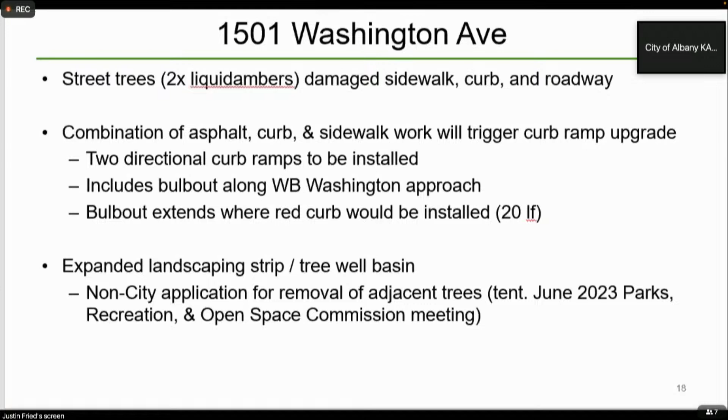So let me see if I can bring up a highlighter. There's 2 directional curb ramps that are in line with the path of travel per city direction, and to get these to fit without having these flares issue—meeting and having a potential tripping hazard or a low spot that might cause some ponding in the ramps—we needed to space these out more, which is why we have the bulb out in design.

To get, for safety improvements, since we're doing all this curb ramp work, one of the things we do is, per city policy, daylight the intersections. So that is a 20-foot red curb on approach, which would be on Washington, and then a 10-foot on departure, which would be on Curtis.

As part of these, there's currently a storm drain in place here to get this all to work. We're relocating and placing a new inlet on Curtis and a new inlet along Washington. The Washington one in particular is very important because otherwise we'd have significant ponding since we are bulbing out the curb. Similarly, the Curtis one will intercept water coming from the north to make sure it's not flooding the ramps.

With that in mind, we do put some red curb about 2 feet beyond the curb ramps and the storm drains, to make sure people aren't blocking or parking in front of them. Now keep in mind, this is a draft design, it's our 90%.

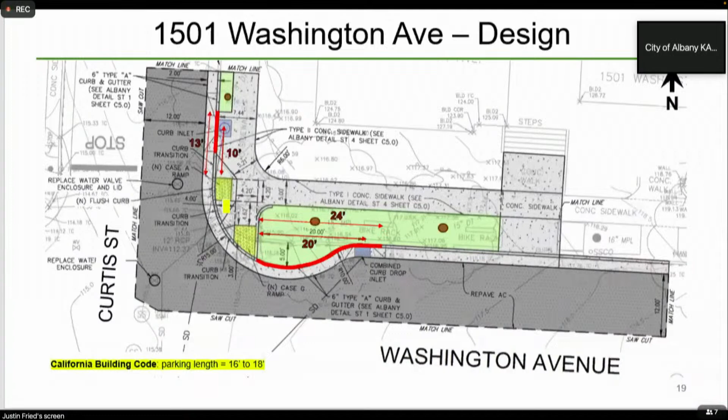So with that, we're ultimately recommending the 2 directional curb ramps: a case A along Curtis and a case G with a retaining curb crossing Washington, with the bulb out. And then the red curb, 13 feet and 24 feet, that we do plan to bring down to 10 feet and 20 feet respectively, as long as there are no storm drain relocation issues, which again, we're pretty confident that we can get within. Okay.

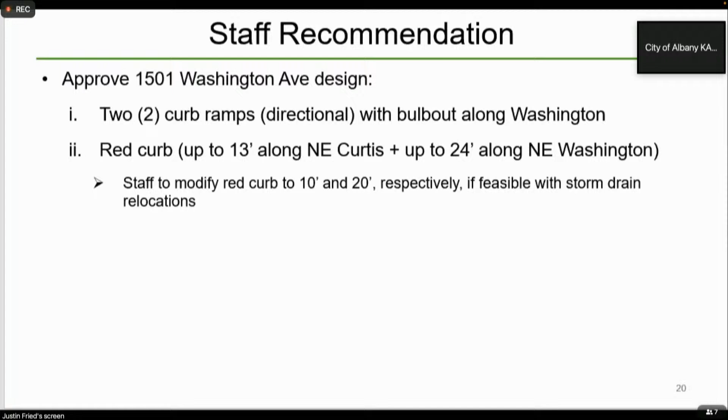Okay, questions from the commission? Yeah, are you going to do any more red curbing? I thought in one of these drawings I saw some more red curbs. So there is red curbing for 1501 Washington, and then the next item, there's red curbing for 602 Santa Fe.

No, I mean, are you going to do the other side of Curtis Street? So if you're southbound on Curtis, are you going to red curb that part of the intersection as part of this? This is just for the sidewalk, related to the sidewalk program and curb ramp upgrades—we're staying completely within the work extent for this project. So you're just doing the northeast corner and that's it? No modifications to the other three corners? Not on this project, no.

I believe so, I'd have to double check the grading plans we have. If that's the way it's been drawn up, I'm pretty confident that's what it is. And I'm seeing some nodding back there, so I'll take that as good.

I can jump in briefly. I've been doing a lot more curb ramps recently, so maybe I can explain. Part of this holistic repair is that the sidewalk has heaved significantly, and there's a very high crown on Curtis. So we're actually taking advantage of this project to do less streetscape work at a later time. That makes very good sense. Thank you.

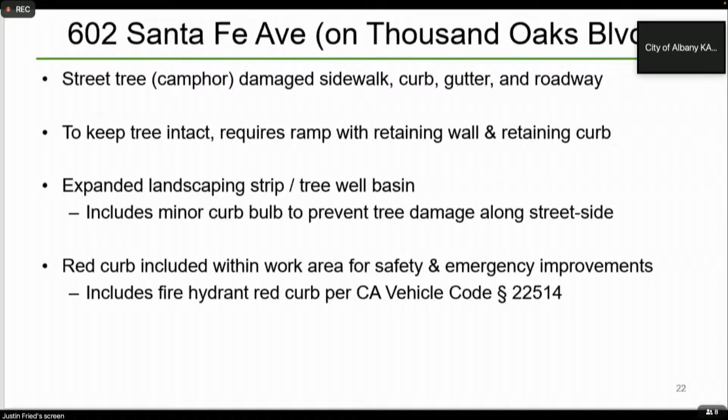So there's some red curb here per policy as well as per vehicle code. I'll get into why we are red curbing for this project. Let me bring up this highlighter again.

As I mentioned, we are bulbing out slightly, just about 2 feet. Normally without parking, it was about 18 feet to the center line, and we're reducing it to about 16 feet. So when a car is parked here, it's a car that's normally maybe 7 to 9 feet parked width, but now we have an extra 2 feet because of the bulb out.

So to really make sure that we're keeping the curb ramp visible with a wider obstruction, we're proposing to do 20 feet per policy at the approach. Now again, since we are slightly narrowing the road to the center line, it'll be 16 feet.

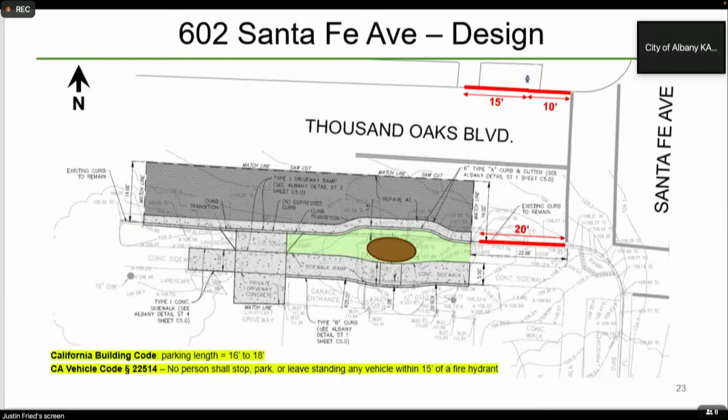That's really it for this one. If you have some more questions or need some more clarification, let me know. But ultimately, we're recommending approval per policy of 20 feet on approach and then 25 feet on the opposite side per state vehicle code.

Any questions from the commission? No, no questions.

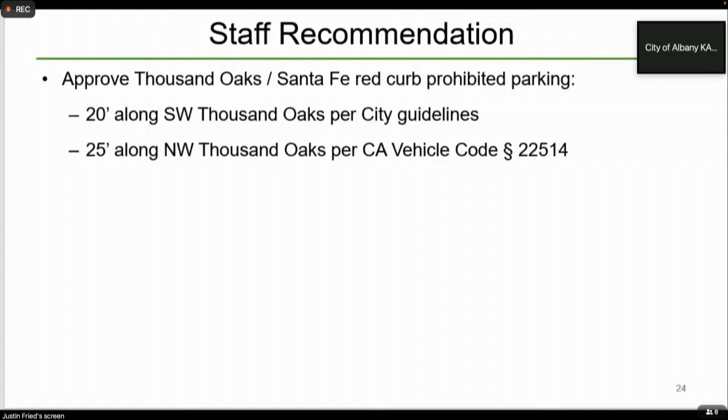The street sign for the street name sign with numbering notation is wrong at the northwest corner of this intersection. Does this project trigger updating the street sign?

No, but we'll bring that up to maintenance. They handle the signs. Actually, I have a list from when I did the census. I'll get back to you, Allison. Okay, it doesn't have to be approved by the commission.

Okay, any other questions? Public comment? Anybody online? I don't see any hands raised online. Okay, discussion?

I think it makes sense, and the fire hydrant seems like it's not even up to us. That's fire code, vehicle code too, but...

I apologize, in my delirium from the kitchen I missed your explanation of what we were doing about red curbing or not along the tree bulb out. So as it stands, we're not proposing any red curb there unless the commission thinks we should recommend otherwise. Like I said, it's a pretty minor bulb out, just 2 feet on a rather wide road, just to the center line, it's 18 feet being reduced to 16 feet. It's about a 36-foot wide road, curb to curb.